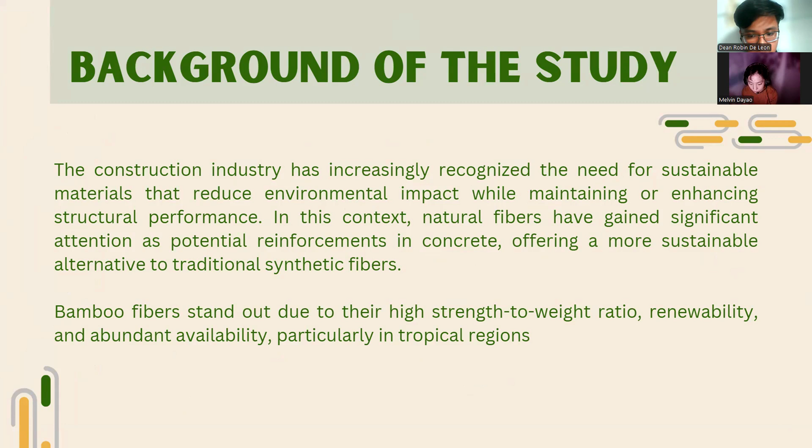For the background of the study, the construction industry has increasingly recognized the need for sustainable materials that reduce environmental impact while maintaining or enhancing structural performance. In this context, natural fibers have gained significant attention as potential reinforcements in concrete, offering a sustainable alternative to traditional synthetic fibers. Bamboo fibers stand out due to their high strength-to-weight ratio, renewability, and abundant availability, particularly in tropical regions.

However, the use of bamboo fibers as a reinforcement material in concrete is still in the early stages of development. Raw bamboo fibers are susceptible to moisture absorption, biological degradation, and variability in mechanical properties, limiting their application in concrete composites. Chemical treatments such as alkali and silane treatments have been proposed to improve the compatibility of bamboo fibers with cementitious materials, enhancing their durability and mechanical properties to address these challenges.

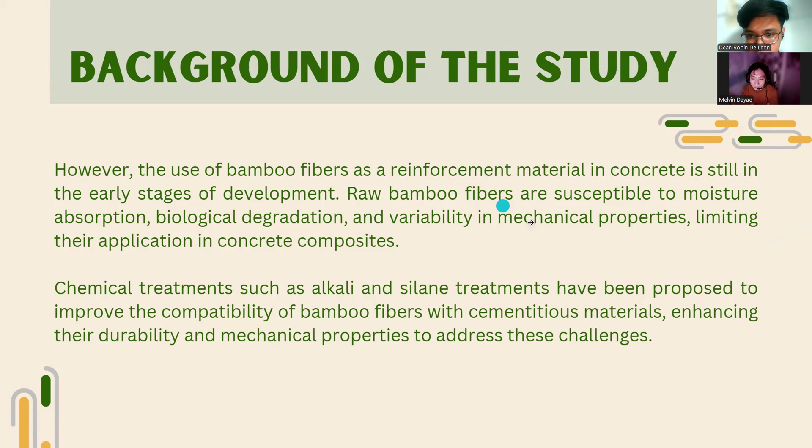For the hybrid treatment of alkali and silane, Valadez-Gonzalez studied the enhancement of the interfacial shear strength between henequen fibers and a thermoplastic matrix through combined treatment. Their fibers were treated with 2% sodium hydroxide solution to remove surface impurities, followed by silane application using 1% silane and 0.5% dicumyl peroxide mixture in methanol water. This treatment altered the fiber morphology and composition, with FTIR and X-ray photoelectron spectroscopy confirming effective silane deposition. As a result, the composite's tensile strength improved from 21 to 27 megapascals.

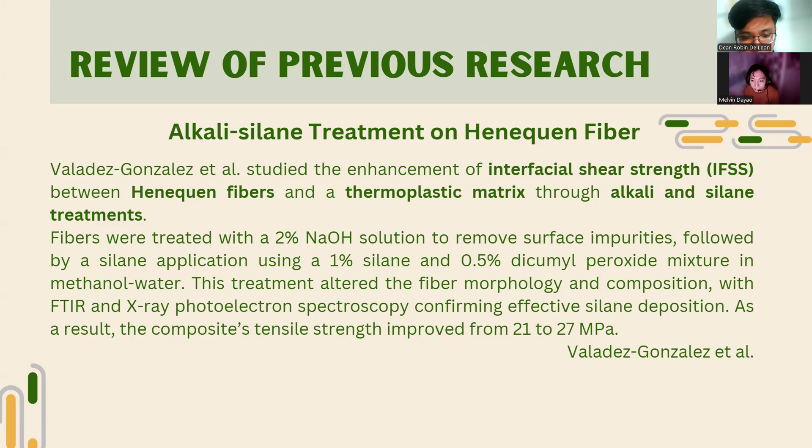The objectives of this study are to investigate the effectiveness of an alkali-silane treatment on the chemical composition, thermal stability, surface morphology, and thermal behavior of bamboo fibers. This will be determined through the changes in the chemical composition of the fiber surface via FTIR spectroscopy, the thermal properties of the fiber via TGA, and the morphology of the fiber via SEM.

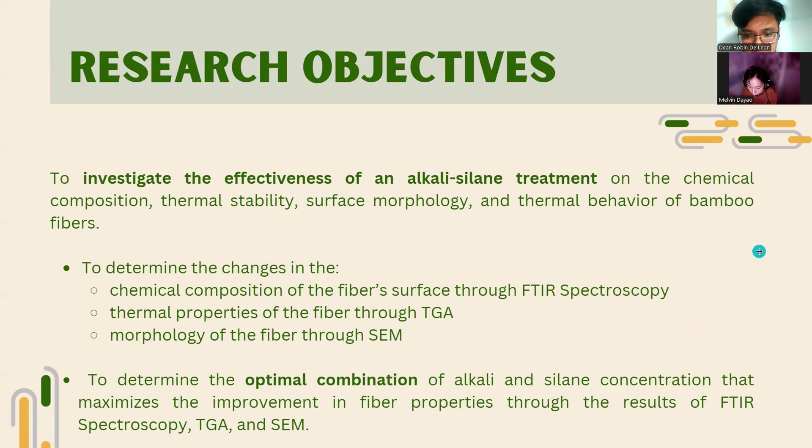We will also determine the optimal combination of alkali and silane concentrations that maximizes the improvement in fiber properties. The second objective is to assess the effectiveness of the treated bamboo fibers as a reinforcing material in concrete, which can be determined through the mechanical properties of the composites such as the splitting tensile strength test per ASTM C496, the flexural strength test per ASTM C78, and the compressive strength test per ASTM C39.

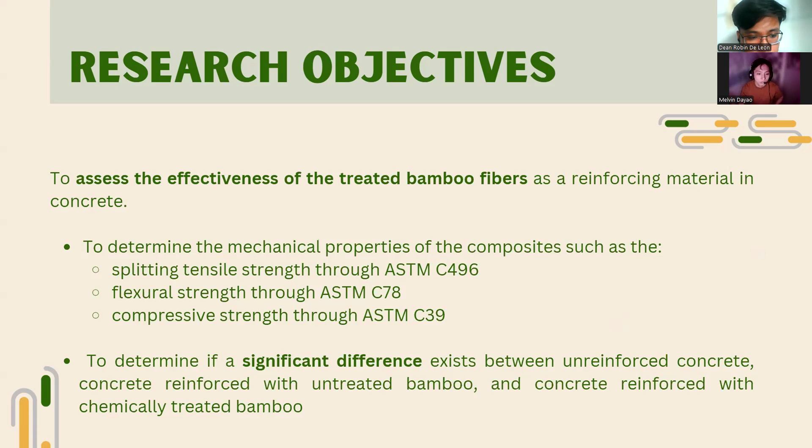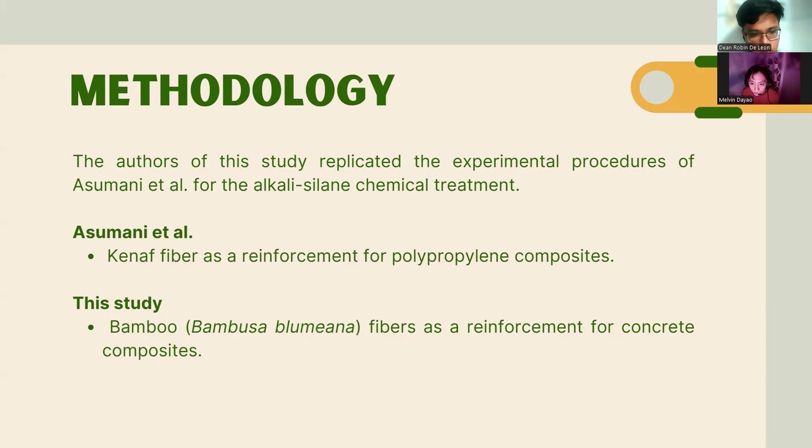In our study, we replicated the experimental procedure used by Asumani et al. in their research on alkali-silane chemical treatment. Our study followed a similar methodology but focused on a different type of fiber and composite material—specifically, we used bamboo fibers. The study sourced the needed Bambusa blumeana samples from Nueva Ecija.

Before the bamboo samples underwent chemical treatment, they had to undergo a pretreatment process where the bamboo internodes were dried at an outdoor surrounding temperature of about 36 degrees Celsius over a 7-day period. Afterwards, the bamboo strips were cut to approximately 60 by 5 by 1 mm and then washed with deionized water to remove any impurities.

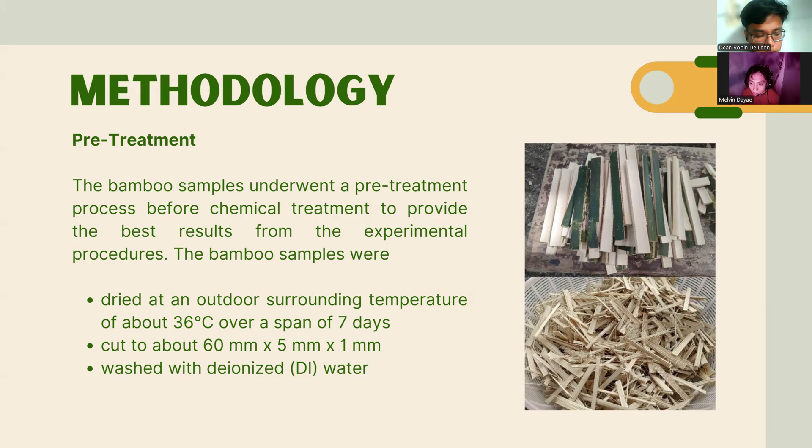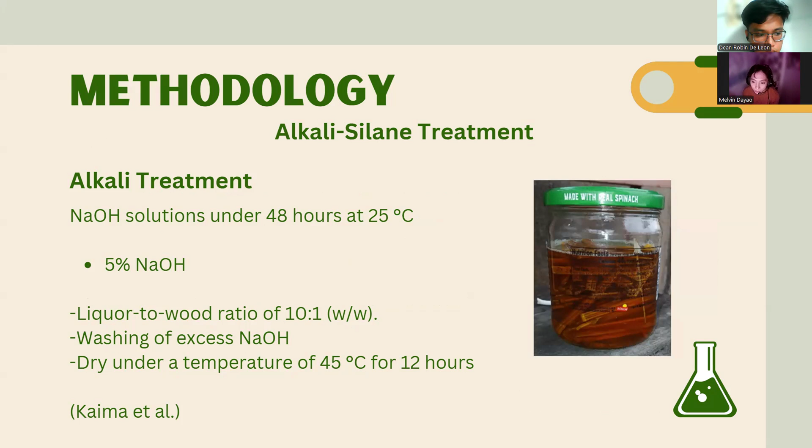For the alkali-silane treatment, the first step involved performing an alkali treatment. In this study, sodium hydroxide was used. Bamboo samples were exposed to 5% sodium hydroxide for 48 hours at 25 degrees Celsius, as proposed by the study of Kaima et al.

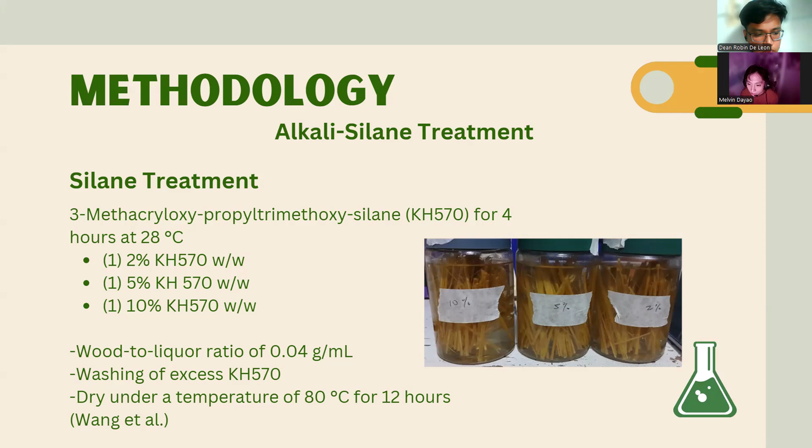Following the alkali treatment, silane treatment was conducted using the silane coupling agent 3-methacryloxypropyl trimethoxysilane, or KH570. Three different concentrations of KH570 were tested—2%, 5%, and 10% w/w—as recommended by Wang et al. The alkali-treated fibers were soaked at 28 degrees Celsius for 4 hours. After soaking, the samples were washed with distilled water and then dried in an oven at 80 degrees Celsius for 12 hours.

To assess the impact of alkali-silane treatment on the bamboo fibers, various tests were conducted. These tests examine the fiber's chemical composition, thermal stability, surface morphology, and thermal behavior. First is Fourier transform infrared spectroscopy, used to compare the chemical composition of untreated and treated fibers, revealing changes in their functional groups.

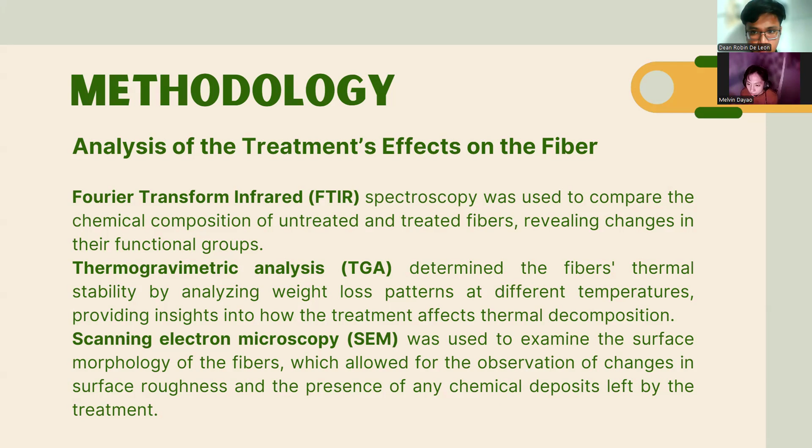Next is thermogravimetric analysis, which determined the fiber's thermal stability by analyzing weight loss patterns at different temperatures, providing insight into how the treatment affects thermal decomposition. Last is scanning electron microscopy, used to examine the surface morphology of the fiber, allowing observation of changes in surface roughness and the presence of any chemical deposits left by the treatment. After conducting the chemical analysis of the treated fibers, the authors selected the concentration that most effectively enhanced the characteristics of the fibers.

After that, the methodology of the treatment of selected concentration was repeated on a larger volume of samples, which were then used as reinforcement materials in concrete mix.

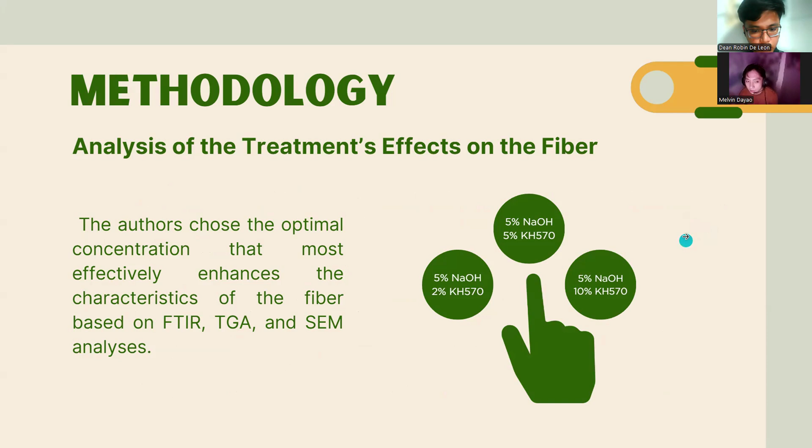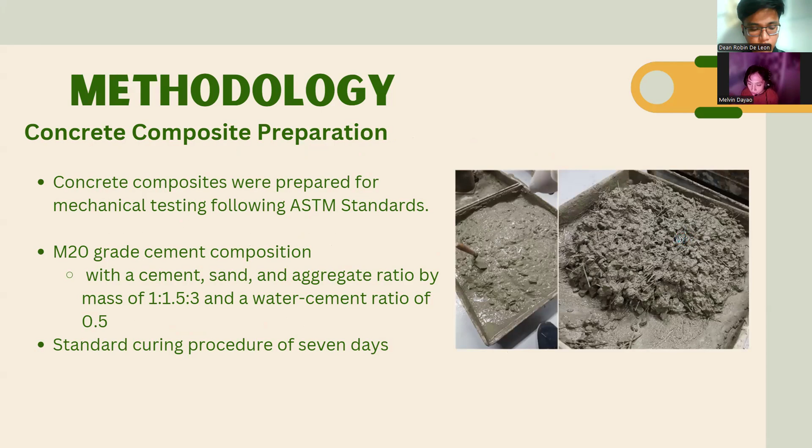For the concrete preparation, to prepare the concrete composite for mechanical testing, ASTM standards were followed, and M20 grade cement was used, mixed with sand and aggregate in a ratio of 1 to 1.5 to 3 by mass, with a water-cement ratio of 0.5. All samples underwent a standard curing procedure for 7 days before the mechanical testing.

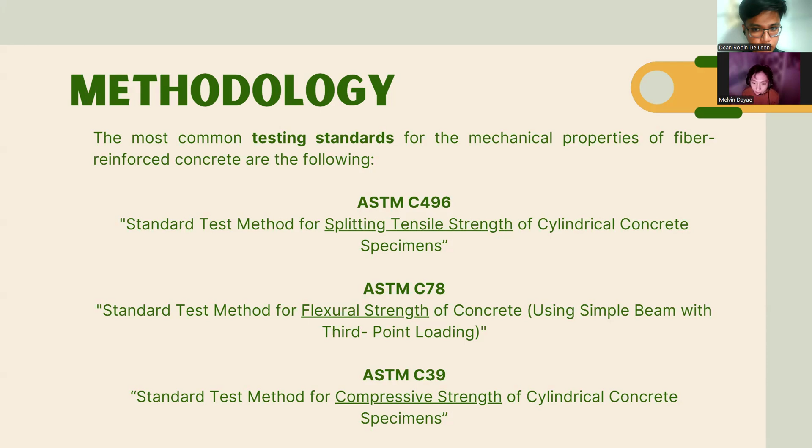For the mechanical testing, the authors used three testing standards for the mechanical properties: the standard test method for splitting tensile strength, flexural strength, and compressive strength, using the universal testing machine of Mapua University. For the splitting tensile strength test, cylindrical molds with a diameter of 6 inches and height 12 inches were used.

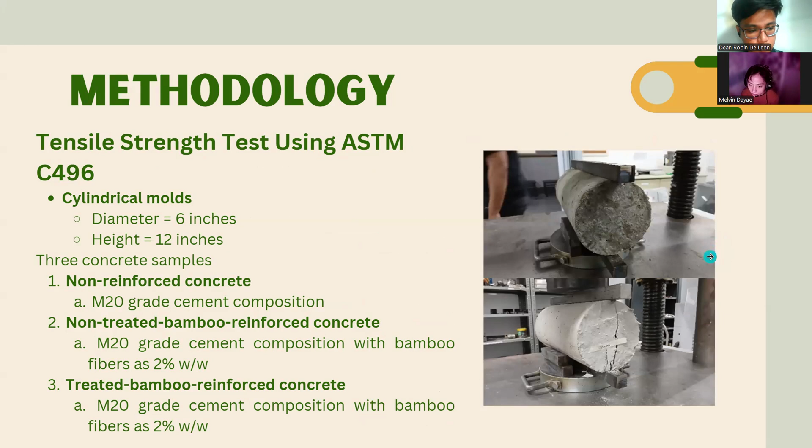Three types of concrete samples were prepared: non-reinforced concrete, non-treated bamboo reinforced concrete, and treated bamboo reinforced concrete. For the flexural strength test, rectangular molds measuring 6 inches by 6 inches by 24 inches were used.

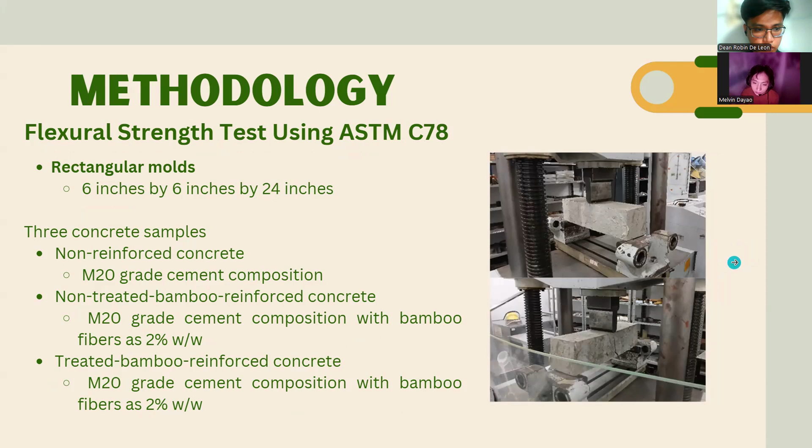Three types of concrete samples were prepared: non-reinforced concrete, non-treated bamboo fiber reinforced concrete, and treated bamboo reinforced concrete. Lastly, for the compressive strength test, cylindrical molds with a diameter of 6 inches and height of 12 inches were used.

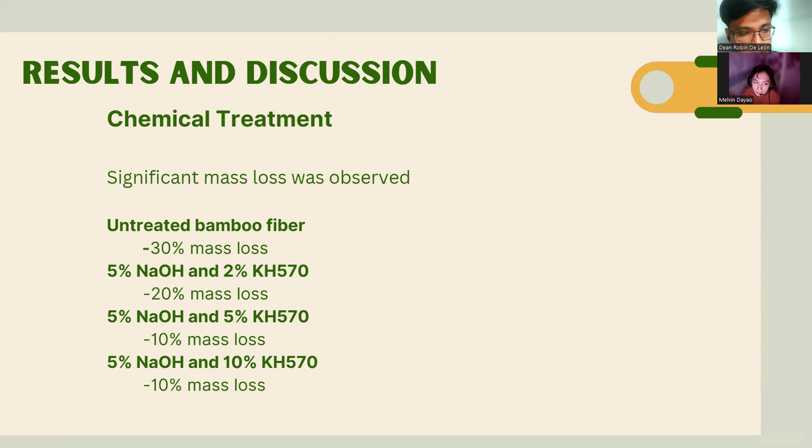For the chemical treatment, significant mass change was also observed according to the results. Moving to the results of the Fourier transform infrared spectroscopy analysis.

The 3345 per centimeter OH peak, indicative of hydrogen bonding, shows a significant reduction, especially in the sample treated with 5% NaOH and 10% KH570, implying a disruption in hydrogen bonds and a decrease in moisture content. The 1029 per centimeter peak associated with lignin also decreases across all treated samples, suggesting partial removal of lignin.

Similarly, the 2904 per centimeter CH stretching peak shows a reduction, with the most significant reduction in the 5% NaOH with 10% KH570 sample, indicating changes to hemicellulose and cellulose. The disappearance of peaks at 1511 and 1424 per centimeter, representing aromatic skeletal vibrations in lignin, indicates effective lignin removal.

This result explains that despite the hydrophilic nature of bamboo fibers, alkali-silane treatment can significantly reduce their moisture retention. The treatment removes hemicellulose and lignin, which are hydrophilic components of the fiber.

By removing these, the treatment exposes more cellulose hydroxyl groups, making the fiber surface more reactive, so that when silane reacts with the exposed hydroxyl groups, it introduces hydrophobic groups onto the fiber surface while reducing the hydrophilic sites that water can bind to. The appearance of a 1503 per centimeter peak, especially in the 5% NaOH and 10% KH570 treated sample,

indicates Si-C bonding, suggesting effective bonding between the silane coupling agent and the bamboo fiber surface. These findings suggest that higher silane concentrations intensify fiber modification, resulting in a more structurally stable and compatible reinforcement for composite applications.

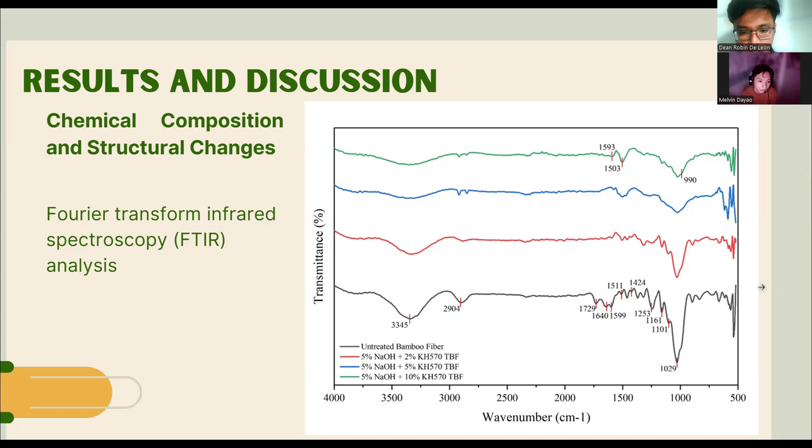The TGA and DTG results indicate that the fiber treated with 5% NaOH and 10% KH570 is the most thermally stable among the tested samples, as it consistently exhibited lower weight loss percentage throughout the analysis.

The minor peaks observed in the DTG curves of all samples, especially the absence of a small curve at 308.5558 degrees Celsius in the treated samples, further support the notion that the treatment has improved the overall thermal stability of the fibers. Additionally, the results imply that thermal degradation is influenced by the structural changes induced by the treatments, leading to variations in thermal stability among the samples.

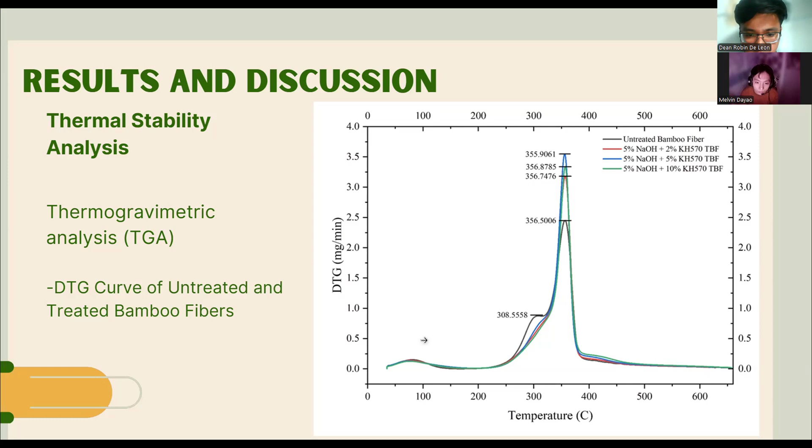Moving on to the results of the scanning electron microscopy. In Figure A, the untreated bamboo fibers have a rough and sharp structure compared to the smooth surface of the treated fibers in Figures B, C, and D.

Moreover, the surface of the treated fibers became progressively smoother as the concentration of KH570 increased, and furthermore, impurities are present throughout the samples, but more are eliminated as the KH570 concentration increased, which can be observed in the bumps on the cellulose microfibrils and the lumen structures. The cellulose microfibrils are the elongated parallel lines, while the lumen structures are short, rounded rectangles.

Additionally, the empty lumen structures are visible in Figure A, which decreased in appearance as the concentration of KH570 increased. This reduction may be attributed to the filling of the empty lumen structures with silane. The smoother surface, removal of impurities, and the disappearance of empty lumen structures all suggest successful bonding of the fiber.

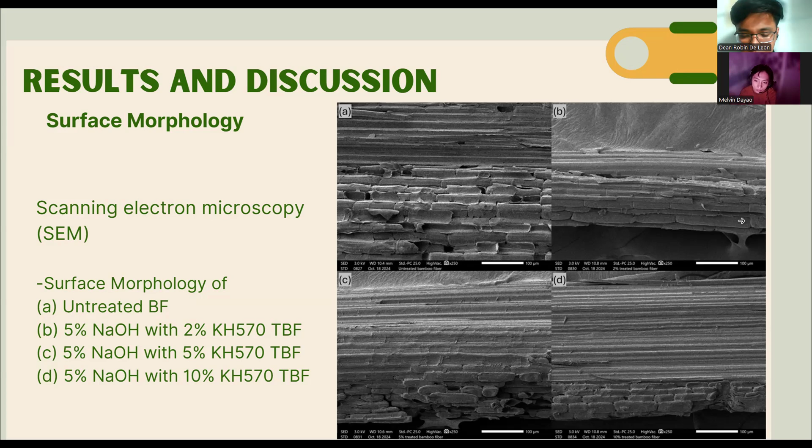Sample with silane. The combination with fibers treated with 5% NaOH and 10% KH570 appeared to be the most effective for this chemical analysis. And based on the results of the FTIR, thermal stability analysis, and surface morphology analysis,

the optimal treatment concentration for enhancing the properties of bamboo fibers and making them ideal for use as a reinforcement material in concrete was determined to be 5% NaOH combined with 10% KH570.

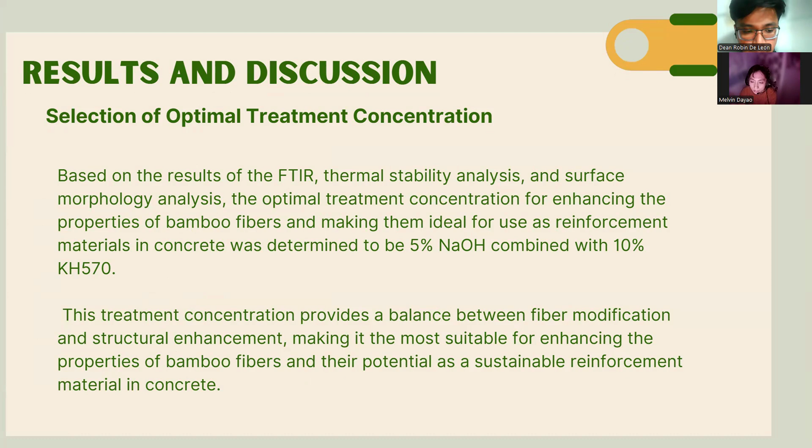This treatment concentration provides a balance between fiber modification and structural enhancement, making it the most suitable for enhancing the properties of bamboo fibers and their potential as a sustainable reinforcement material in concrete.

And for the mechanical properties of concrete composite, the maximum load and sample dimensions were used to calculate the corresponding tensile, flexural, and compressive strength.

For the splitting tensile strength test, the table presents the test results, including maximum force, maximum stress, and calculated tensile strength. Treated bamboo fiber reinforced concrete exhibited the highest performance with a maximum force of

157.6 kilonewton and a maximum stress of 8.64 megapascals and a calculated tensile strength of 2.16 megapascals.

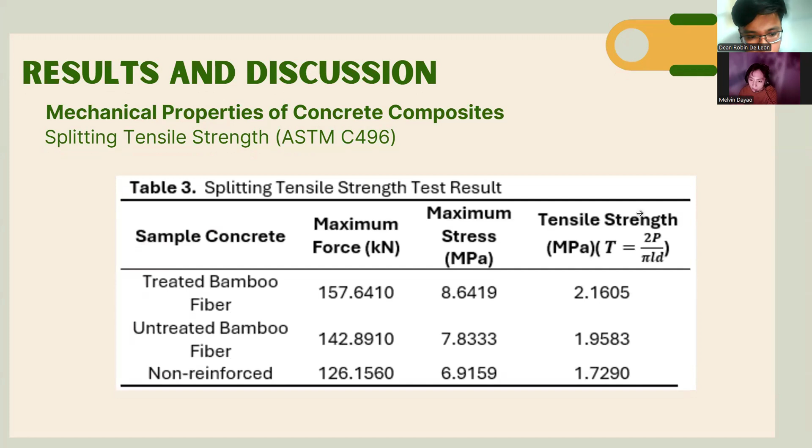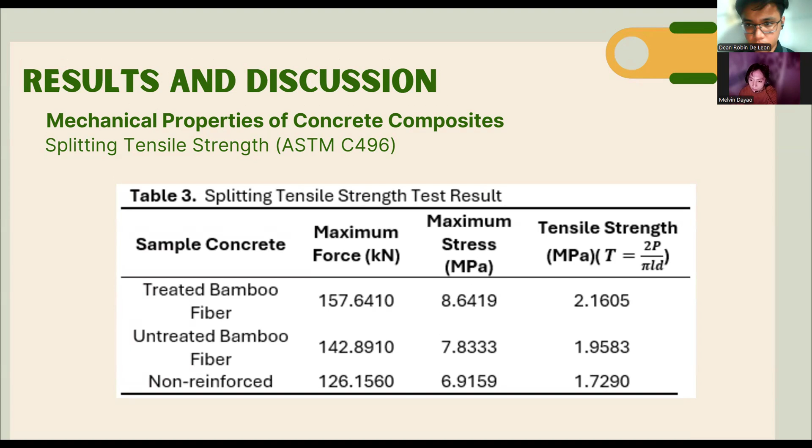This represents a 10.3% increase over the untreated fiber reinforced concrete, which had a tensile strength of 1.95 megapascals, and a 24.9% increase compared to non-reinforced concrete with a tensile strength of 1.72 megapascals.

For the flexural strength, treated bamboo fiber reinforced concrete exhibited the highest performance with a maximum force of 14.98 kilonewton, a maximum stress of 3.56 megapascals, and a calculated flexural strength of 2.58 megapascals.

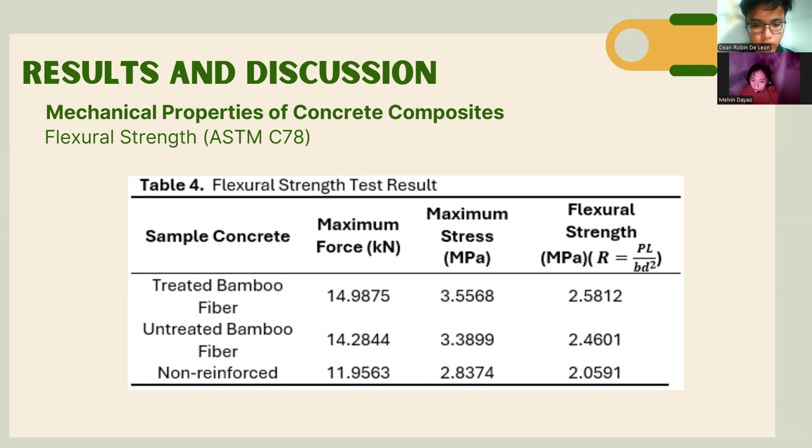This represents an increase in flexural strength compared to the untreated fiber reinforced concrete and non-reinforced concrete, which had a flexural strength of 2.46 megapascals and 2.06 megapascals respectively.

And for the compressive stress, treated bamboo fiber reinforced concrete exhibited the highest performance with a maximum force of 235.3 kilonewton, a maximum stress of 12.89 megapascals, and a calculated compressive strength of 12.89 megapascals.

Compared to untreated fiber reinforced concrete, the treated fiber reinforced concrete showed a slight 0.9% increase in compressive strength, with a compressive strength of 12.78 megapascals.

It also demonstrated a significant 26.2% increase compared to non-reinforced concrete, which had a compressive strength of 10.21 megapascals.

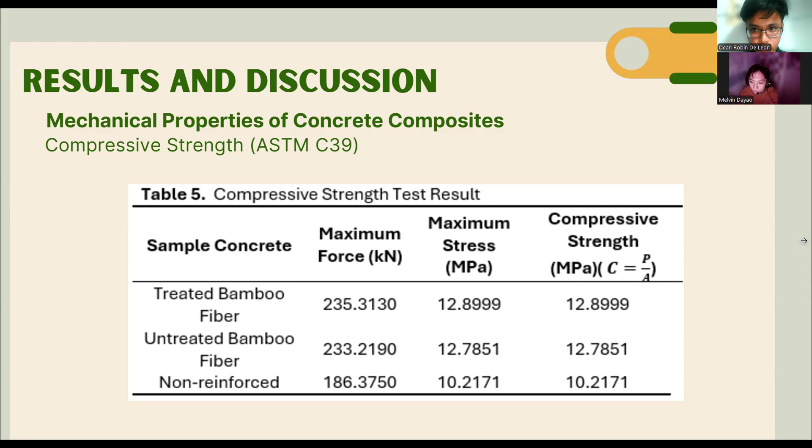To conclude the study, the authors investigated the effects of the alkali-silane treatment of bamboo fibers, and upon interpretation of the results from the various tests, the authors obtained the following findings.

The alkali-silane treatment effectively improved the Bambusa blumeana fibers by removing impurities, creating a bridge between hydrophilic fibers and hydrophobic materials, enhancing surface morphology, increasing thermal stability, and reducing moisture retention.

The FTIR spectra showed changes in peak intensities and positions indicating impurity removal, including moisture, lignin, and hemicellulose. The spectra also revealed the removal of OH bonds and the formation of silicon O-C bonds and silicon C bonds,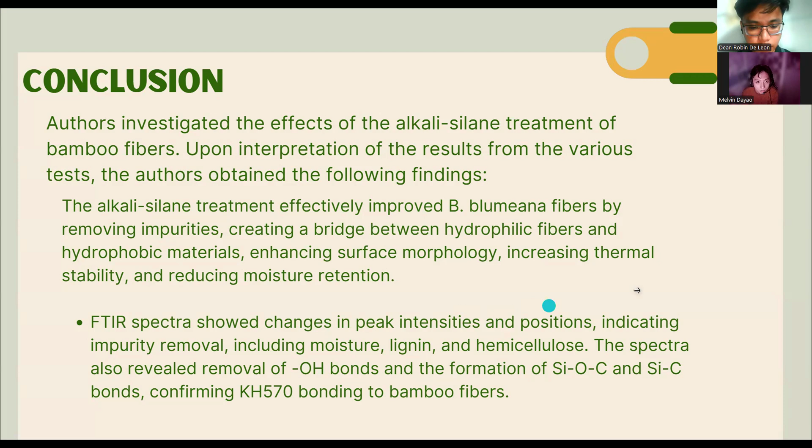confirming KH570 bonding to bamboo fibers. TGA curves show that the treated fibers retained more mass when heated.

Untreated fibers had two significant mass loss spikes at 308.56 degrees and 356.50 degrees Celsius, whereas treated fibers exhibited peaks at higher temperatures at around 356.75 degrees Celsius, indicating greater thermal stability.

SEM micrographs revealed smoother fiber surfaces, impurity removal, and filled lumen structures, suggesting KH570 adhesion.

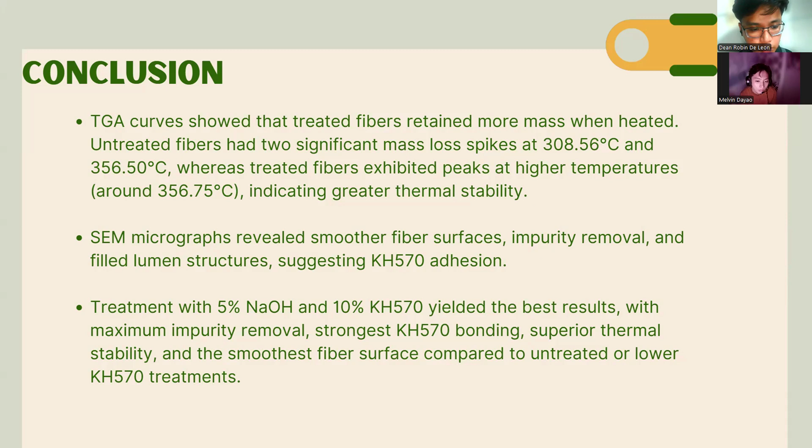And the treatment with 5% NaOH and 10% KH570 yielded the best results with maximum impurity removal, strongest KH570 bonding, superior thermal stability, and the smoothest fiber surface compared to untreated or lower KH570 treatments.

The treated bamboo fibers serve as an effective reinforcing material in concrete composites, enhancing key mechanical properties such as the splitting tensile strength, flexural strength, and compressive strength. The treated reinforced composites showed superior performance compared to untreated and non-reinforced composites.

According to the results of ASTM C496, the splitting tensile strength increased from 1.73 megapascals to 1.96 and 2.16 megapascals. ASTM C78 revealed that the flexural strength increased from 2.06 to 2.46 and 2.58 megapascals.

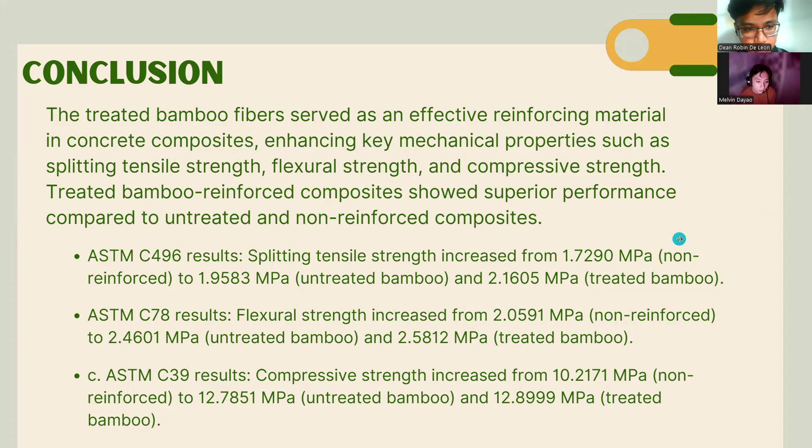And the ASTM C39 results revealed that the compressive strength increased from 10.22 to 12.79 and 12.9 megapascals, with the treated bamboo fibers exhibiting the highest strength. And that is all for our presentation.